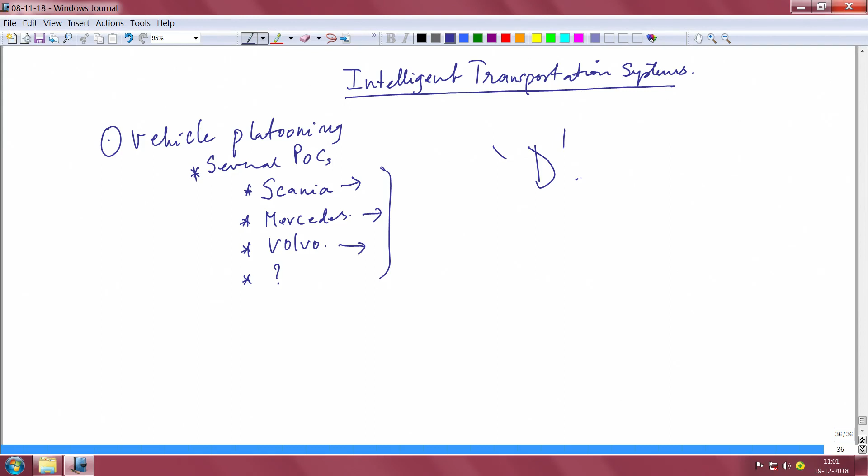distance between vehicles. Okay. Let me quickly draw my famous vehicle. There is one vehicle and then there is another vehicle, right. This inter distance, this is D, the separation distance. People are attempting under 6 meters, something humanly not possible at all. If you have a driver, you do not have the reflexes to brake at 6 meters; it is not going to work.

This is the attempt, this is the goal, this is what they want to reach. But right now today it is anywhere between 30 to 50 meters; I think at least 30 meters they are able to go. Even anywhere between 10 and 30 meters is also something that people have attempted.

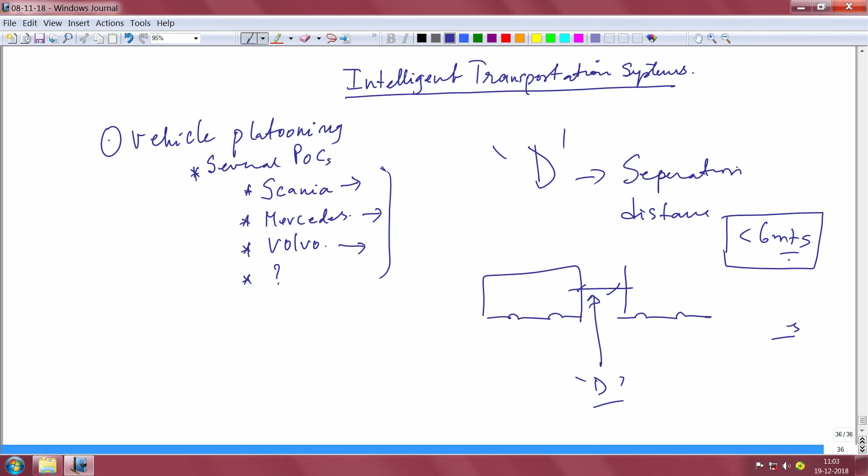Sorry, my vehicle has met with an accident, so let me put it back.

Alright, so they are looking at less than 6 meters as I said, but in several videos that you see they are even looking at 10, 15 and 30 meters and up to about 50 meters. 50 is easy, you can pull it off, but on a highway 50 meters is still pretty close actually. But anyway, people have demonstrated even 10 meters. So that is the point really, that if you look at that video they will actually tell you what the inter separation is,

and vehicles have to talk to each other and say, hey, tell this vehicle I can brake at 6 meters safely, okay, and you may have to announce back at what distance you will be able to brake, right. You can mention that back to the leader, and I will still keep a driver because we are not talking about completely autonomous.

And you can also say what you want to do when you talk about this braking inter separation distance. You can also say that under any circumstance this D has to be maintained, right. This is the separation distance. And you can also mention to the followers what the stopping distance is. Supposing you see an obstacle, the moment you spot that obstacle, it does not mean that you will apply brake immediately, because that obstacle may simply pass off, right.

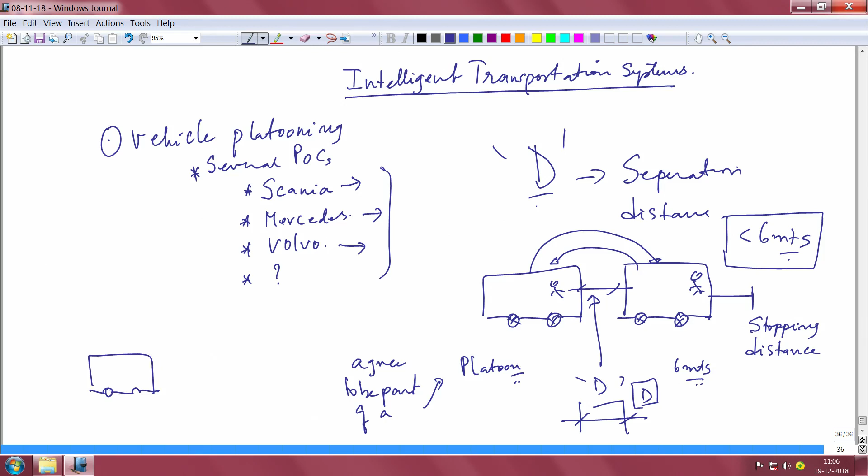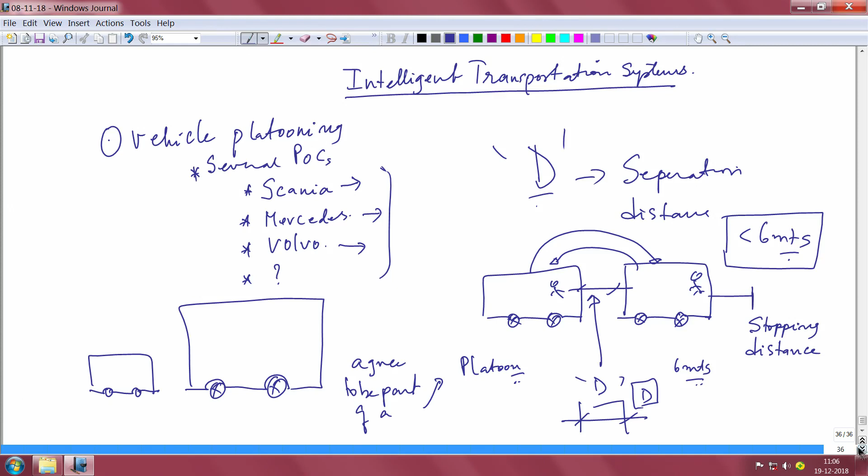Therefore you can now see the rationale why you do not want to mix small vehicles with large vehicles. You do not want to mix trucks with small vehicles, because they have different capabilities. It does not make sense to expect the same kind of response from vehicles, but it might turn out that this little fellow may get sandwiched in very big vehicles, okay. So I will just go on a little further. So while you do not want to do this, it is possible that this might happen.

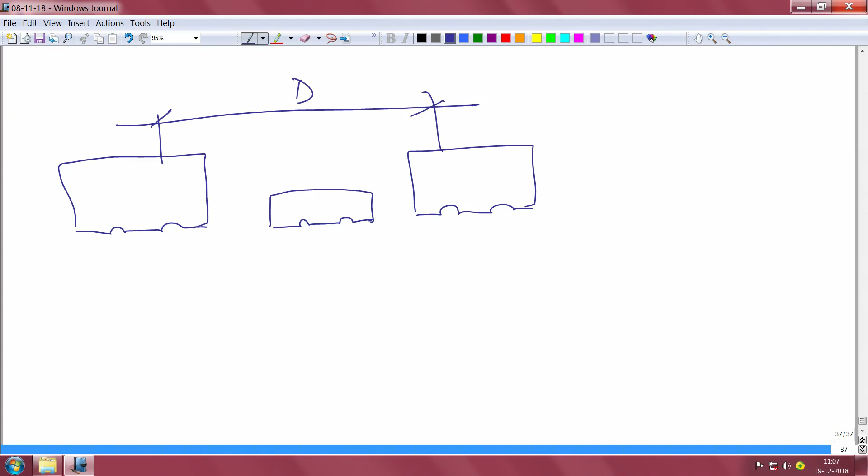These two were originally part of the platoon, rather they continue to be part of the platoon, but a vehicle from here came in the middle of these two. It is possible, in which case this D has to go up, this D has to move, because it becomes equivalent of a stopping distance. So while this is the stopping distance for an obstacle for the leader, this vehicle now becomes the obstacle for the followers. Therefore this D has to increase. In other words, this vehicle may get pushed back.

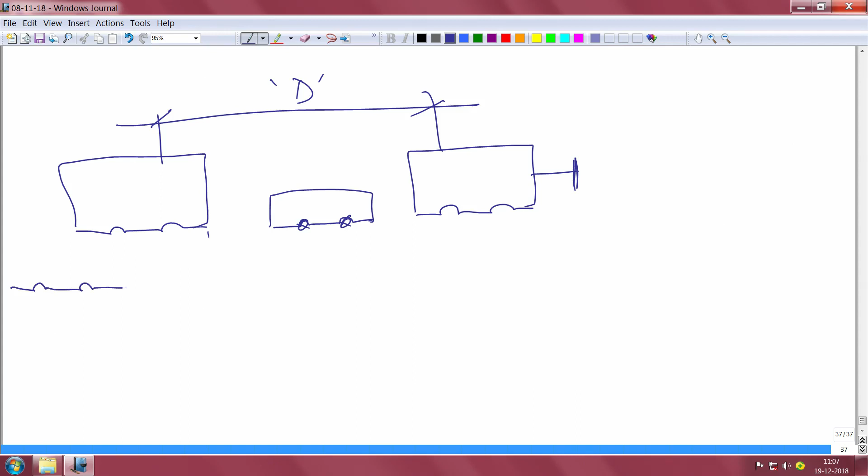I will just show for easy part, I will just remove this and I will show you. Okay, so now that I rubbed it, I can now show it here. So you see it has moved back, this distance has increased. So now your new D actually adds also the separation distance, also adds the stopping distance perhaps to maintain safety, okay. So these kind of things have to happen, capabilities have to be announced.

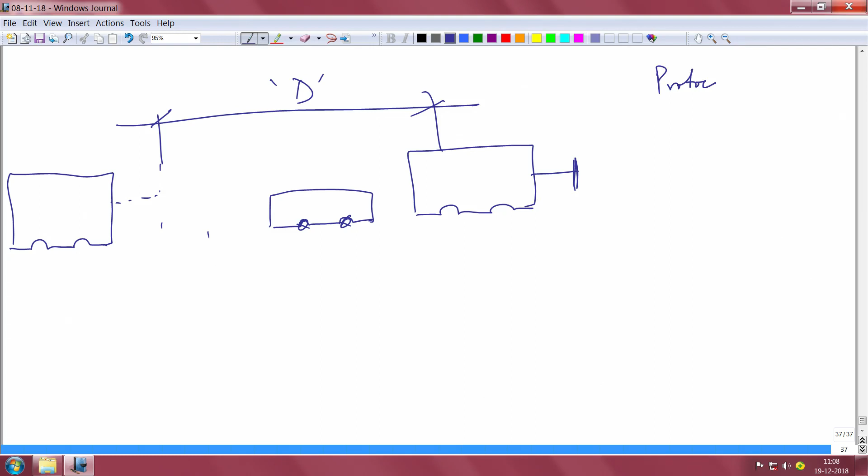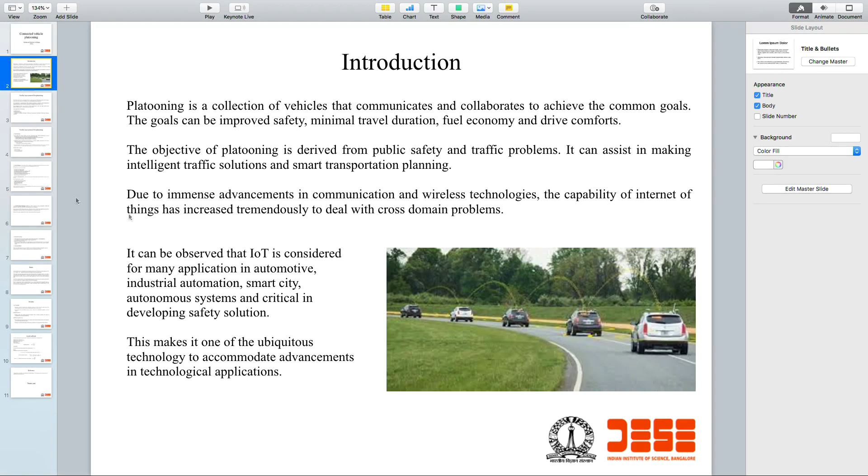So you need a good protocol to communicate from this vehicle to this vehicle, and perhaps also exchange some information in this direction. If there are followers behind this, this information has to hop, right. And now let me show you that same picture. You can see in this picture here, this essentially is doing that. It is just communicating one hop to the follower behind, and the follower in turn is communicating, and so on and so forth. So now let us move on and see what are the minimum things you need to do in order to get a platoon going.

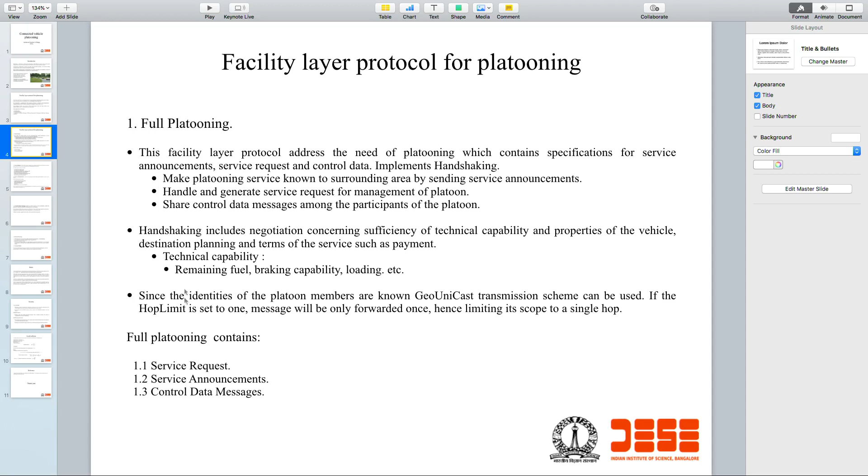Okay. So for full platoons, 3 important things have to happen. Making platoon service known to the surrounding area by sending out service announcements, handle and generate service requests for management of the platoon, and share control data messages. So full platoon means you have service requests, service announcements and control messages. So let us look at each one of them. The first one we will do after we do the second one. The second one is the service announcements.

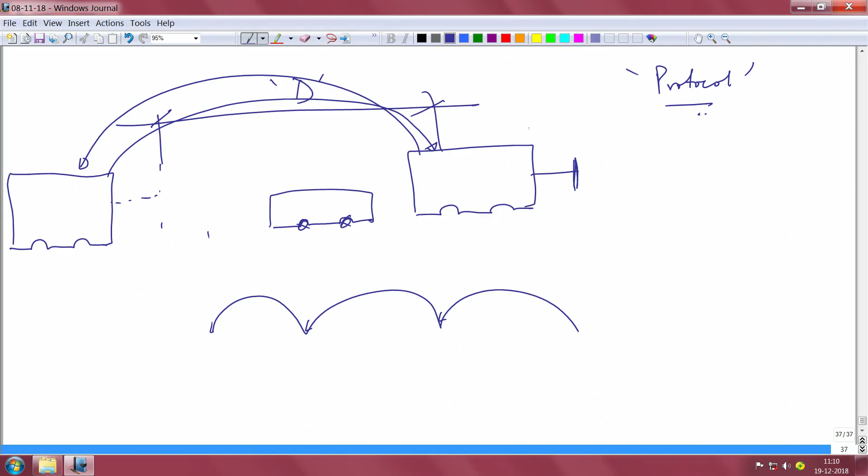Now let me draw your attention back to this picture. This can be elected as a leader. This can be elected as a follower. He becomes a follower if he agrees to be part of the platoon. Now what are the things that the leader has to do? The leader has to make available the current position of the platoon, length of the platoon in meters that he wishes to manage, set speed and actual speed, direction and destination route, platoon ID, and service channel to use for service requests.

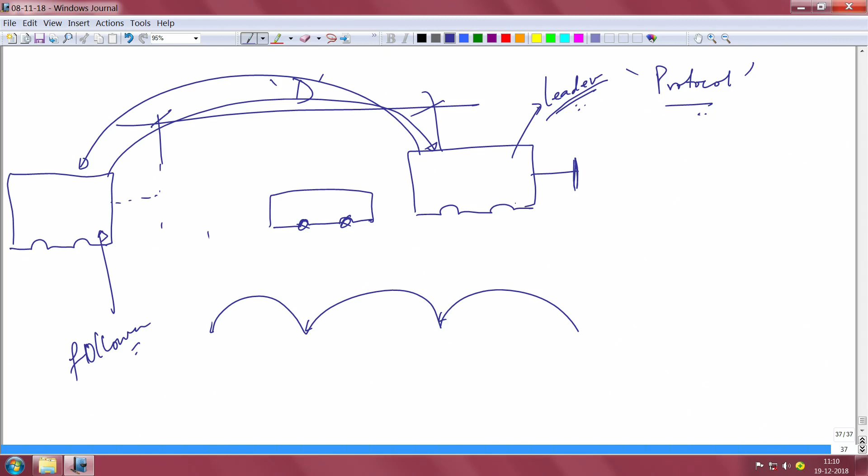Okay. I will go into some details of each one of them. You do not have to learn any of these by heart, but you will have to get an overall view. Let me put your attention back to this picture. Here he is the leader. The road either curves like this or the road can go straight as well. So let me draw a straight road.

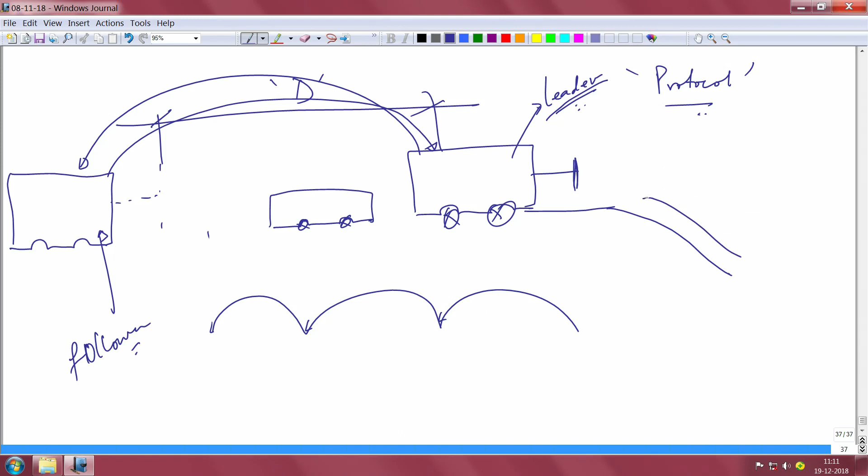Now there is just no point if the leader is going, let us say, some 1000 miles, and this one will go in another direction. There is just no point in declaring to be a leader for a set of followers but taking a deviation right here; it is not going to help, right. Which means you cease to be a leader the moment you take a right turn.

In other words, all information about in what direction you are going, okay, this is your DST, what is your final destination, at what speed you propose to go, passing all information that you can be a leader and announcing your service capability as a leader, all of this should be mentioned right in the beginning. This is one part.

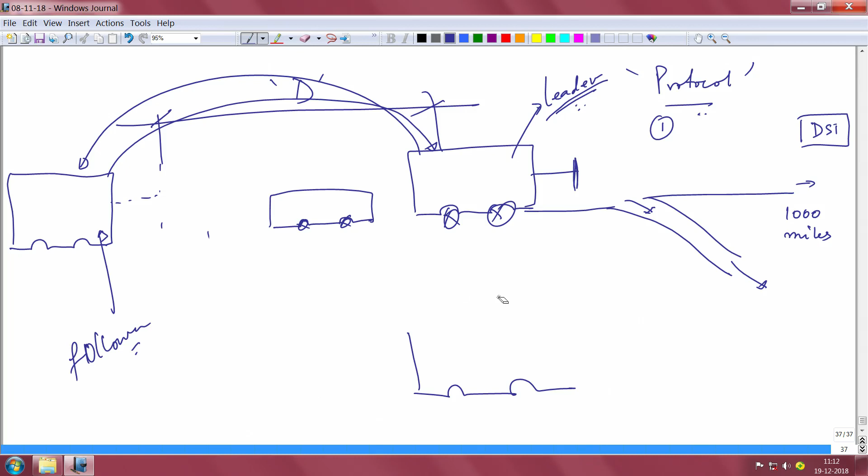Imagine a situation where on the same highway there are multiple tracks, right. There can be one more vehicle, okay. Let me remove this for clarity purpose. There can be one more vehicle running parallel to this guy, also making an announcement. He is making an announcement, this guy is also making an announcement. I have shown this just to show you the wireless capability, okay, a wireless link. Now which one should this follower go after? Should it go after this leader or should it go after this leader? Now that will depend on the parameters announced by the two so-called leaders, right.

Let us say this leader says I am going 2000 miles, which is indeed what this follower is looking at, okay. This follower finds that if it attaches to this leader, it can only follow for 1000 miles, whereas this leader says I am going 2000 miles in the direction of what this follower is planning to go. So this follower may now decide to go behind this leader.

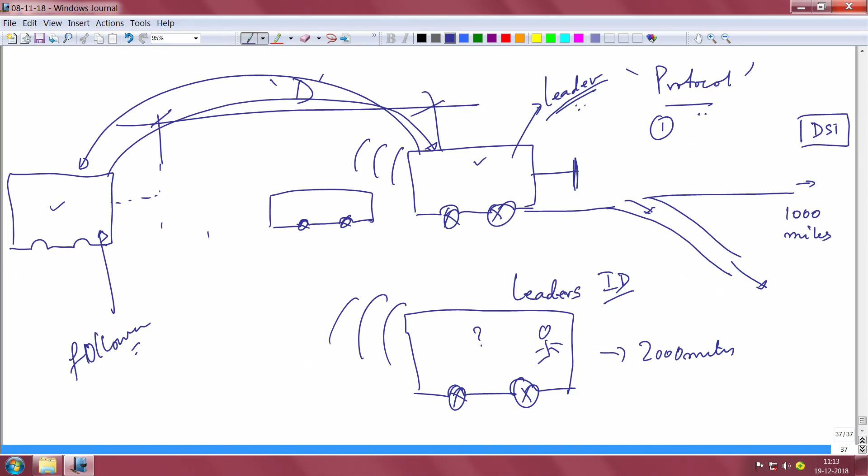Now, what are the followers supposed to do? Go and look at 1.1, create platoon. That means it can say I want to be part of a platoon. So, he says I am ready, I want to create a platoon, I want to be part of a platoon, if indeed there is a platoon I would like to join. So, the second one is saying I am ready to be part of a platoon, that is create platoon. I want to be part of a platoon, join platoon.

I want to leave a platoon because I think that the leader is not in the direction where I had planned originally, or I have special instructions by my truck operator to take a different route, and so on, or I have a problem with my vehicle and I would like to go by a lay-by and stop there. So, there may be many reasons why you want to leave a platoon. And then the leader also can leave. This implies that another vehicle needs to act as a leader, that is re-election of a leader is also part of this first bullet, which is indeed the service request.

Then if the leader finds that there are no more followers, the leader may actually dissolve the complete platoon, right. So, in other words, service requests are sent by vehicles wanting to enter a platoon and vehicles inside the platoon to perform very specific actions. Now, okay, great, now you have service announcements by leaders to enable potential followers, then there are service requests by followers, and there is a provision to create and all that.

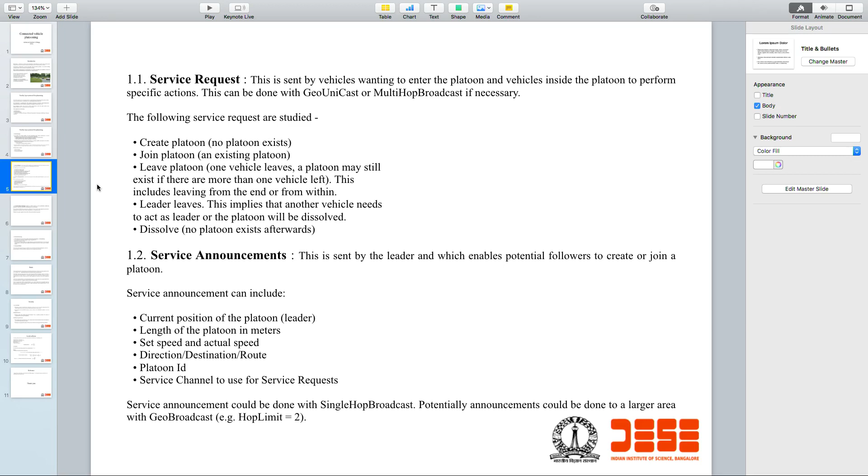How do you maintain this platoon? How do you ensure that if it is going over 1000 miles, you keep exchanging information? Let us look at how that happens. That is possible through what are known as control data messages, which are sent periodically to ensure that the platoon continues to behave the same way, the movements are the same, and there is a provision to ensure that no collision is possible between these vehicles and so on, right.

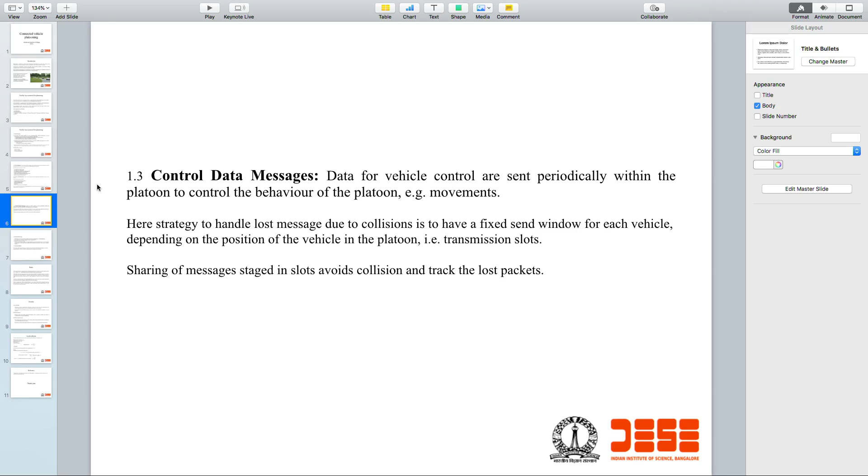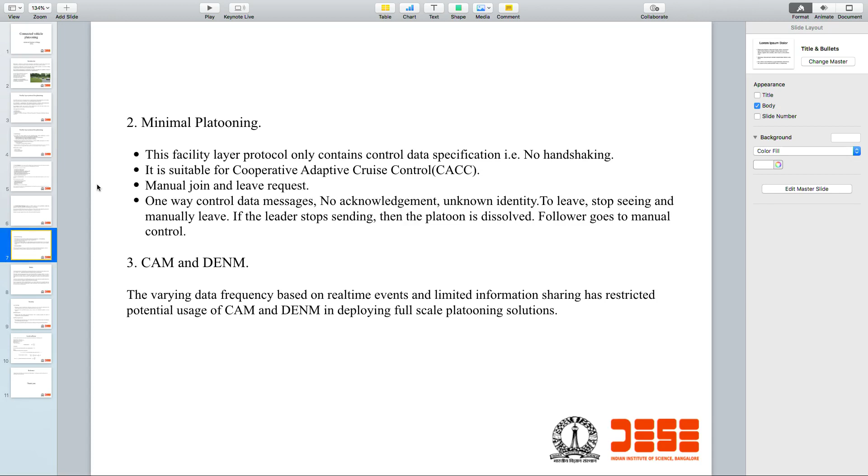So, this is very important. Now, let us look at a little bit of simple stuff. I will skip minimal platooning because it is indeed a subset of the full platoon. So, let us leave that and let us move on to the next slide.

Radio is an interesting thing. This is for communication purposes. I showed in this picture that there is a radio as part of the wireless system. So, people have been talking about 5G wireless networks for the purpose of exchanging this information in the broad spectrum of V2X, and DSRC is something that IEEE has also been trying to standardize in 802.11. This is called dedicated short range radio communication.

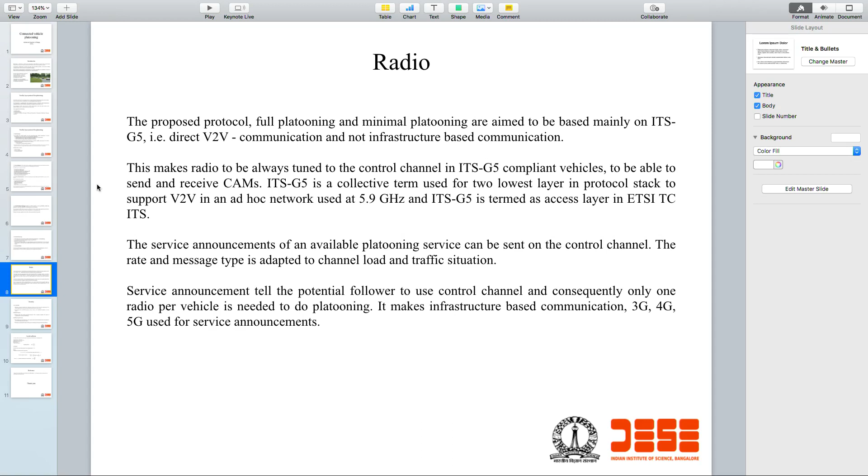Security, as you know, is a very important part of the platoon. You must be looking at leader announcements that contain information about which channel to use and the service request. They are all messages which have to be encrypted. There should be verification of the sender with trusted certificates. So, the full security system gets blown up when we talk about the fact that platoonings have to be maintained. So, let us go on to the next slide.

So, this slide is a very interesting slide. It just gives you a very simple idea of what we have been discussing, and let me draw your attention to this picture here. We mentioned the d, which is the separation distance, right. We also spoke about the stopping distance, that is, when it sees an obstacle, that is going to be a stopping distance.

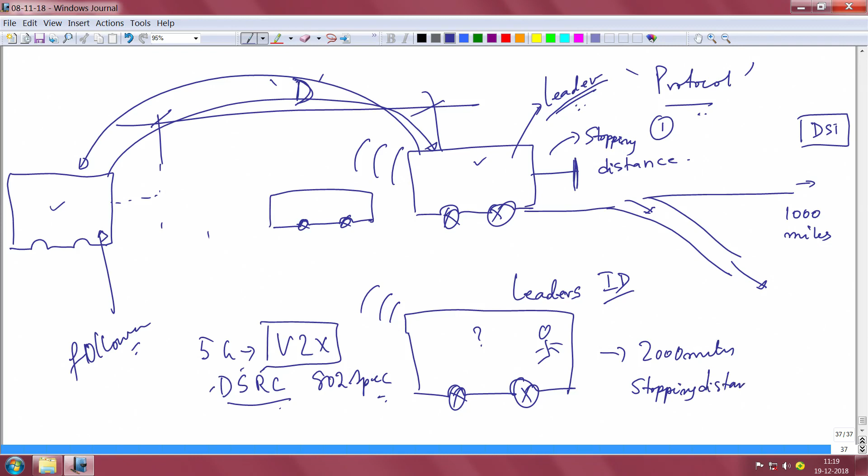So now how does everything connect from simple laws of physics which we know from kinematics? You can calculate this stopping distance easily by applying the third law of motion, which indeed is s = v*t/2, right. s is the stopping distance which you can see here. V is the initial velocity of the vehicle, time of travel or motion is t, and s is simply the stopping distance.

When you say s is the stopping distance, you are talking about the leader's stopping distance, which is s1, and the follower's stopping distance, which is s2. You expect s1 and s2 to be the same because that is the reason they are under a platoon. They have the same capabilities, the braking capabilities are the same, and therefore s1 is equal to s2. This is a very critical part, because only then can you talk about vehicles of the same type being part of a platoon.

Now in order to maintain the minimum separation distance d, you have to ensure that s1 minus s2 plus d is greater than 0, right. That is, the vehicle distance during braking will continue to remain d, so even after the leader and the follower come to a dead halt, the distance is maintained at greater than or equal to 10 meters, or whatever we discussed as the minimum distance. So the d will be there.

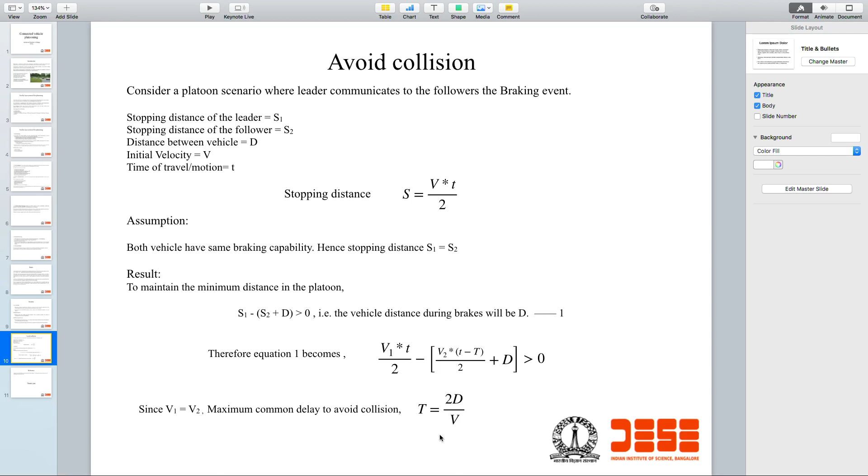So that is a very simple calculation. Again, it came from that nice paper that we found, and therefore you could definitely look up that paper, and the paper is mentioned here: Approaches for facilities layer protocols for platooning, and you can refer to this paper. Hopefully you will be able to find it on the web without much difficulty.

So this is an overview of a platoon, and now let us move on to see how to do this simple platoon example in VREP. So the demo is very simple. Essentially we will show you creation of a platoon. To begin with, there is no platoon, so you have to create a platoon, and then there are vehicles which

want to join this platoon. When you talk about creation of a platoon, if there is no platoon, the one who announces first indeed becomes the leader, and if he is a leader, he will have to do some very special things like what we discussed. Service announcements have to be done, and what does that contain? Position, length, speed, direction, platoon ID, service channels, all that will have to be done specially by the leaders.

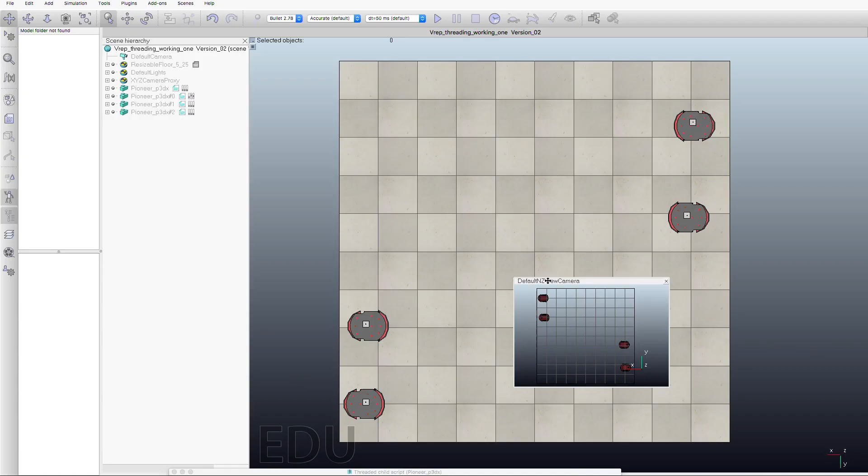So we will start with a demonstration using VREP. VREP is something that you have used previously as part of this course. So we will continue to use VREP and show you some capabilities. Let us turn our attention to the screen. On the extreme right are two vehicles, and on the extreme left there are 2 vehicles.

Now that means basically there are 2 platoons, so they will have different platoon IDs and they expect vehicles to join their respective platoons. The extreme left one and the extreme right one are shown so that the vehicles are crossing each other; the directions are different. So you expect those 2 on the left to be part of one platoon and those 2 on the right to be part of another, because they are in different directions.

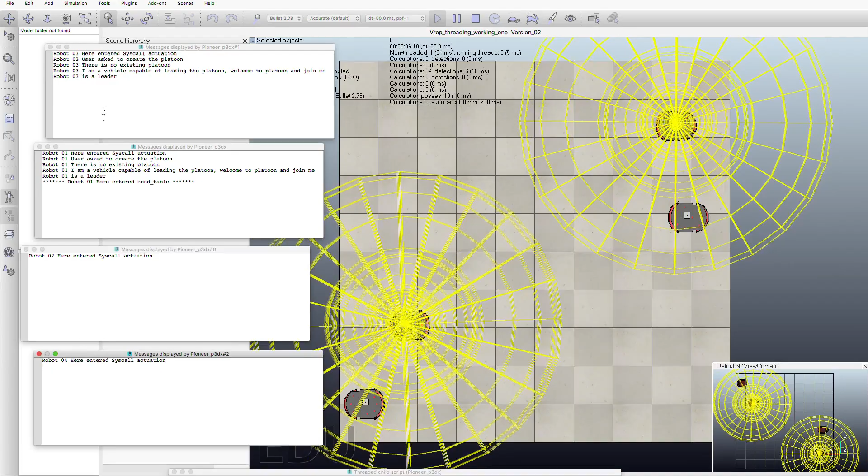So let us start the demo, and before you start you will see something interesting, that there is no platoon. Therefore what should happen? Create a platoon should happen, and then you get a leader, and then the leader will make an announcement. You can see this, they are broadcasting, and you realize suddenly that 2 IDs have been announced, and then there are 2 platoons and then the followers out there.

If you pause and see what actually happens on those screens, let us expand that information a little bit. You will see that Robo 3... let us read a little bit in detail, expand that if possible. Just one screen, yes, a little bigger font if possible. Okay, so maybe you should try this when you find this code, but I will read out what is there.

It says there is no existing platoon, I am a vehicle capable of leading the platoon, welcome to platoon and join me. Then Robo 3 says I am a leader receiving joining request, and a request to add to platoon is coming from a follower, and then the leader says okay you are part of the platoon, so add it to platoon. These are the messages that come about.

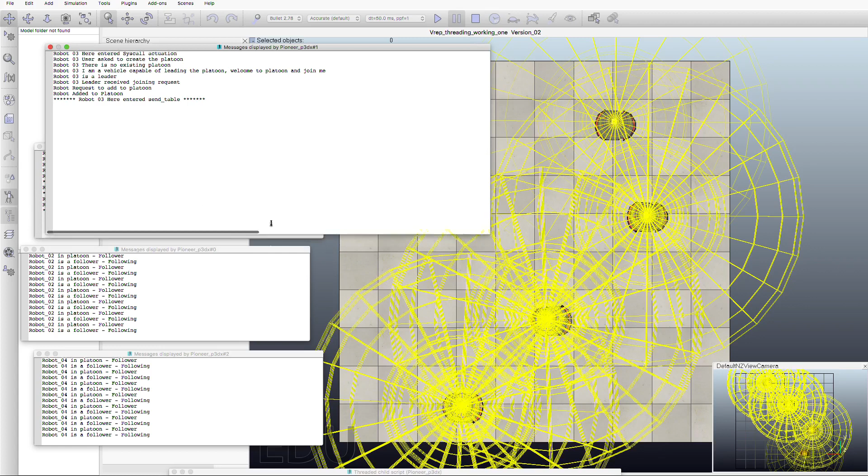You can try this, you can read up the paper, you can look up the YouTube videos I mentioned to you from Scania, from Mercedes, from Volvo, and get a nice idea of what exactly is happening in this world of platooning. Now there is another screen. The robot that we have chosen here is, like the previous one, the Pioneer P3, and those were essentially the ones that were asked to become leaders and followers.

You can see that the second screen is saying that Robo 2 in the platoon is a follower and it is following, going behind the leader, and that message continues as long as the leader exists and the platoon exists; the follower continues to give out messages. So this essentially conveys our idea of platooning.